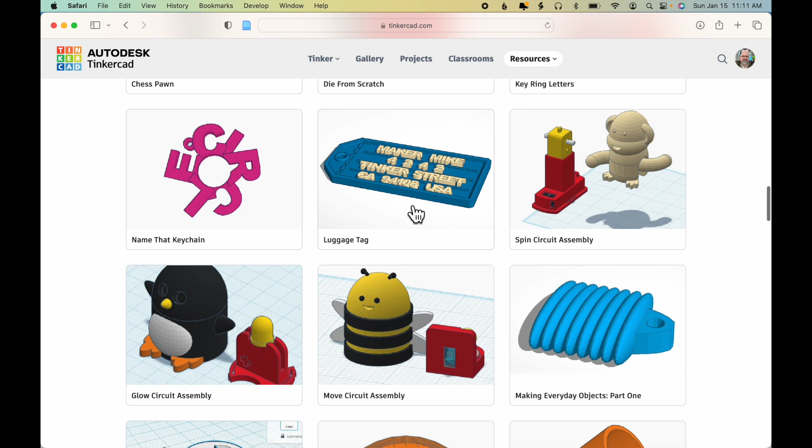Luggage tag. Do the entire tag, but you don't need to use your actual home address if you don't wish. You can use the address of your school instead. You'll be doing the zipper pull, Making Everyday Objects. If you click on this exercise, you'll see that there are several lessons included in it. You only need to do number 4, the backpack zipper pull.

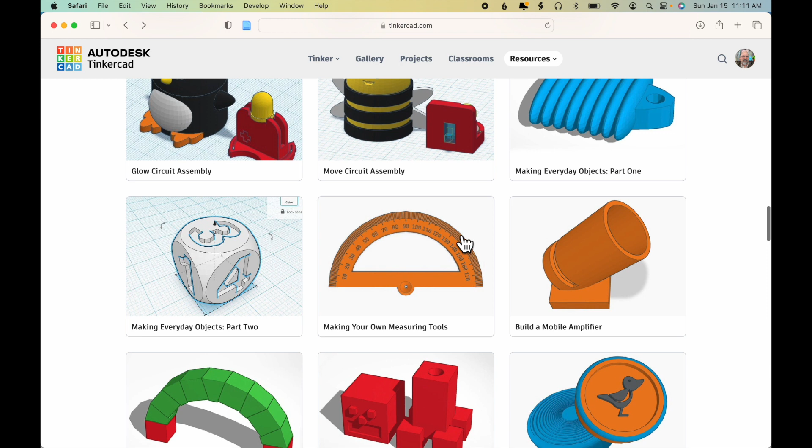And similarly for Making Everyday Objects, Part 2, if we look at that exercise, you'll see there are 3 lessons, and you will only need to do number 3, create your own monogrammed ring. For all of these exercises except the monogrammed ring, the settings are very straightforward for FlashPrint. They're flat models with no overhangs or other unusual features to keep in mind. But the ring poses some interesting challenges, and we'll take a quick look at that now.

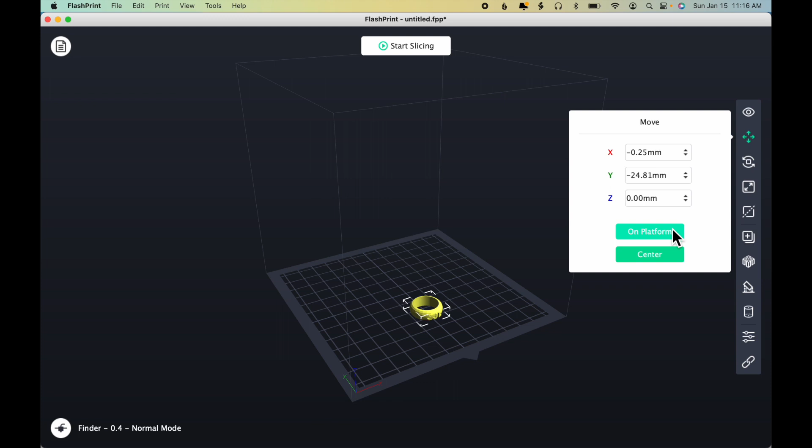Here's the monogrammed ring in FlashPrint. I'll click Move, On Platform, Center, and then scroll in, click View, then click and hold on the model to move it up to the center of the screen, and continue to zoom in so that we can examine it more closely. Look at the bottom. You can barely see little tiny tips of blue here. That's where the model is actually resting on the print bed.

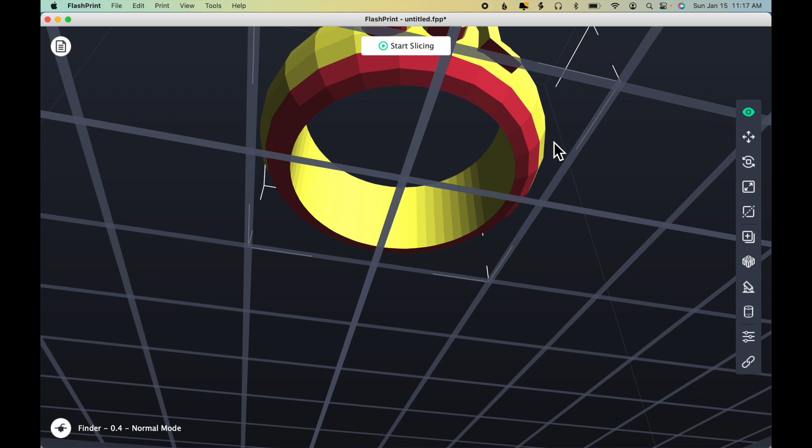The rest of these facets are all in red at the bottom, indicating that they're not flat on the print bed. These very bottom ones in particular are at a very steep angle, and then the next row at less of an angle. But that's all going to need supports. And of course, underneath these letters will also need supports.

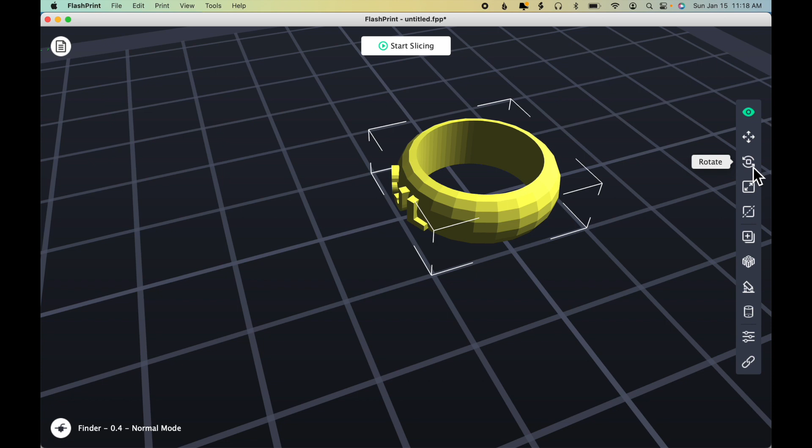Now you might think that just rotating the ring would solve the problem of most of those supports, at least for the letters. But let's take a look at that. We want to rotate it in the X direction. We'll click 90 degrees. Oops, it's the opposite of what we want. That's okay. We'll just click 90 and 90. So now that it's facing up, click off the model.

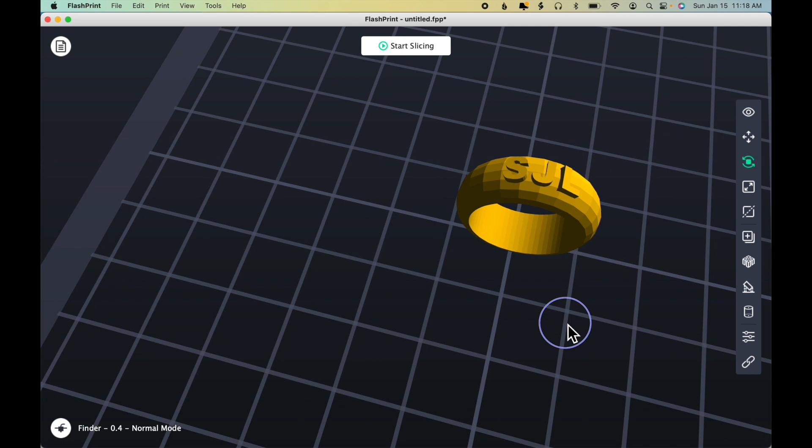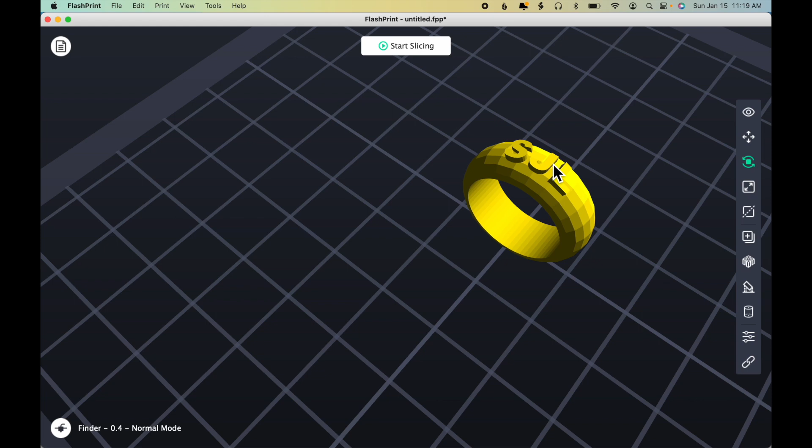So in this orientation, the letters would not require supports, but of course now the inside of the ring and this whole bottom area would require supports. So you could print it this way. You would end up with sort of a topographic effect, layer lines for the letters, which might be fine if you're printing at a high enough resolution, but there is a way to get smoother letters, and that's to print it in its original orientation.

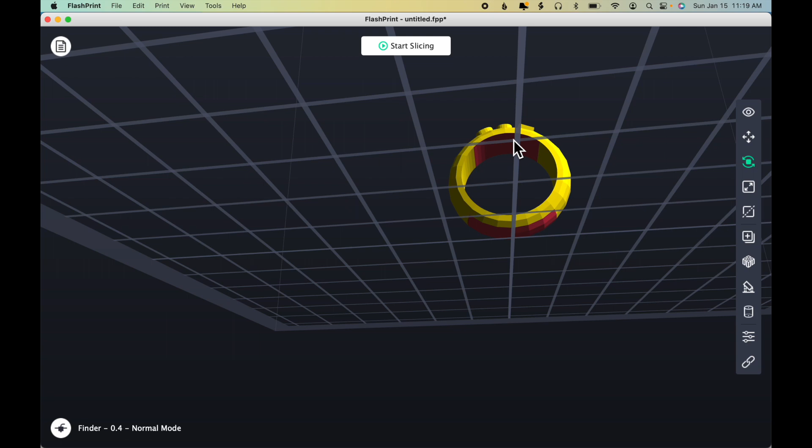The other concern you might have about printing the model this way is that with those interior supports, those will come out, but there'll be a little bit of roughness there. Of course, you can use an X-Acto knife and even sandpaper to smooth that out, because you're not going to want that rough surface against the skin of your finger. But if we print the model in its original orientation, there will be no supports on the inside, and so it will be nice and smooth. So I'm going to try it that way.

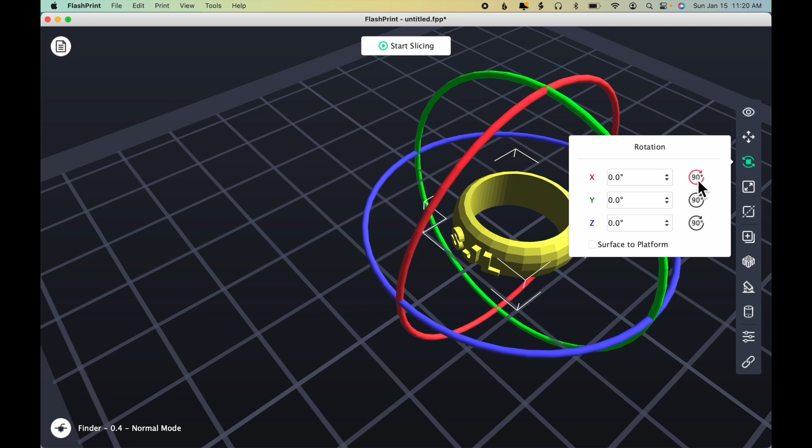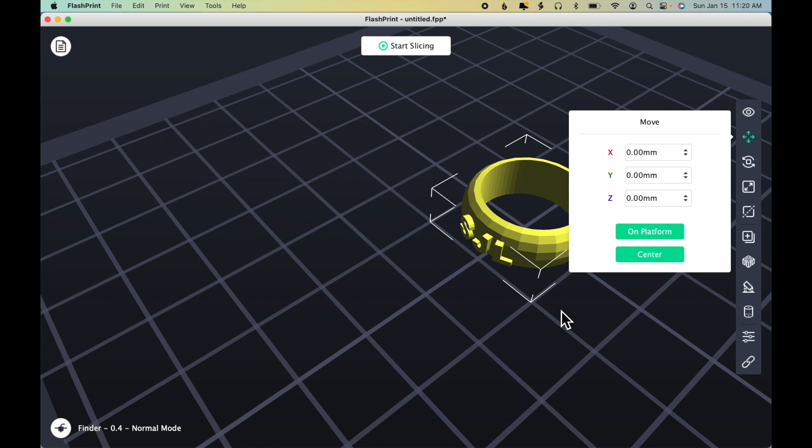Now, remember, you can print it multiple ways. You can try printing it standing up, and you can try printing it laying down like this, and see which orientation you prefer. It's a small model, so it shouldn't take very long to print. Because it's barely touching the build plate, I'm going to go ahead and actually lift it up 3 millimeters. Make sure it's centered, okay?

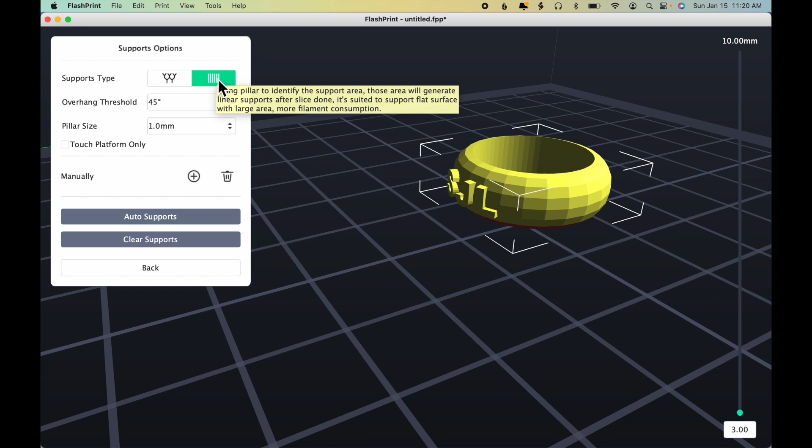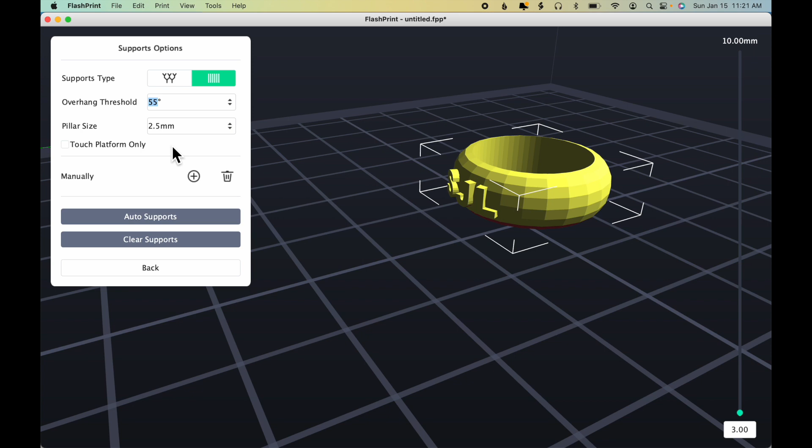And now I'm going to add supports. Choose pillar, and the pillar size is 1.0 millimeters because that's what it was the last time I used it. The default is 2.5, so I'm going to change it back to the default. And actually the threshold overhang was 55 degrees by default, so I'm going to change that as well and click Auto Supports to see what we get.

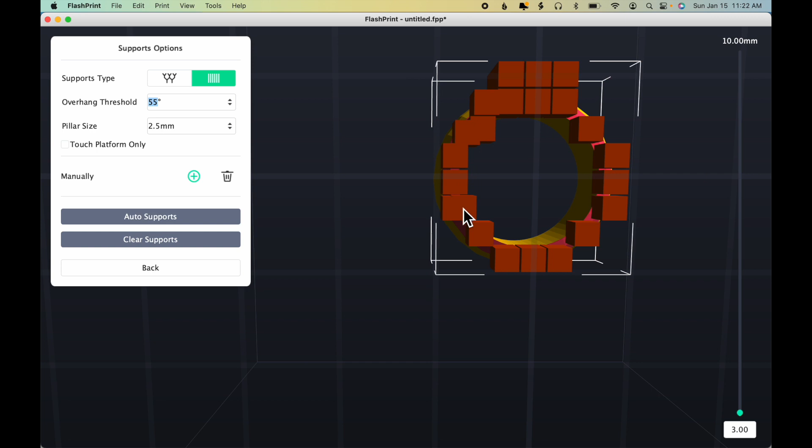Okay, well, it's covering some of the area, but not all of the area. So what I'm going to do is I'm actually going to click the plus sign, and I'm going to go ahead and fill in those areas where I still see some red. So I'm just clicking to add supports to make sure that bottom area is completely covered. Okay, that bottom is well covered.

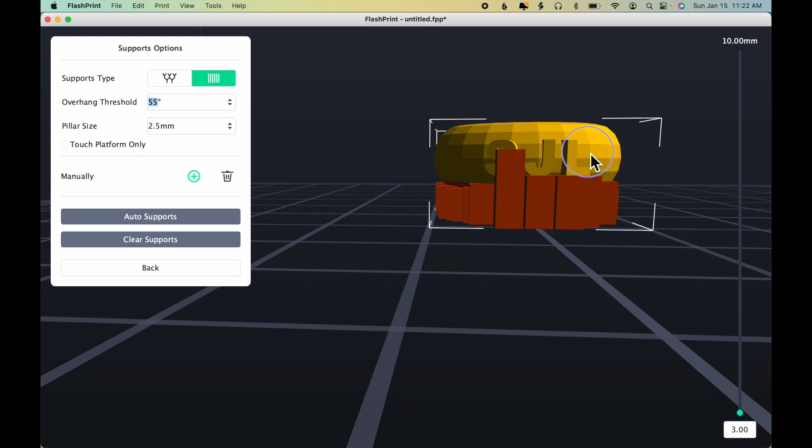You see there's a piece of the L that wasn't covered. The J looks pretty good. The S, there's a piece there that probably could use some support. And that part of the S, and maybe over here. Okay. All right, so now I'll call that good. Click back, click Start Slicing.

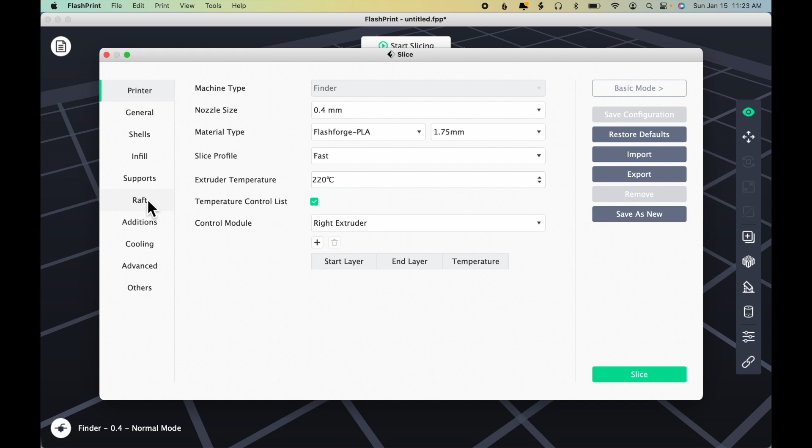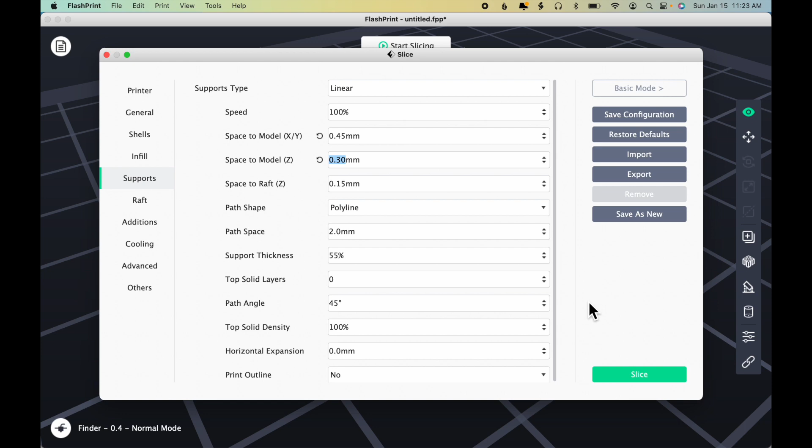Since I added supports, and some of those supports are resting on the build plate, I need to turn on the raft. We'll say yes. And then under supports, I'm going to increase the space to model X and Y to 0.45, and space to model Z to 0.3, and top solid layers to 2. And click Slice, Slice Preview. And that's what we have.

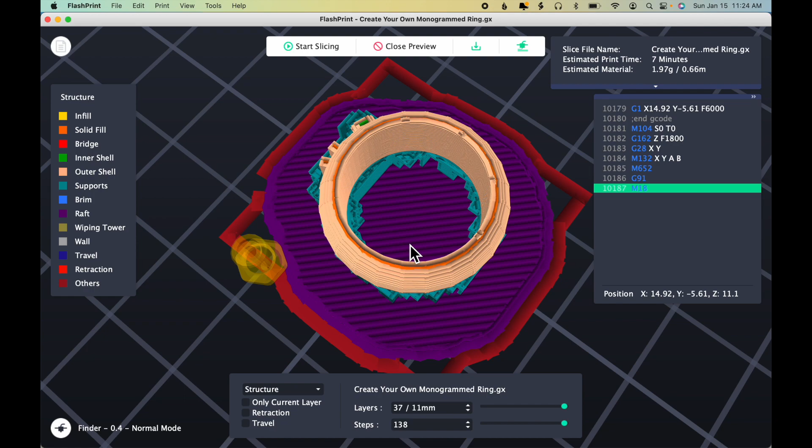So we have a raft, we have lots of support for the letters and the bottom part of the ring, and a nice clean interior. So that should be nice and smooth against your finger. You see the print time is only 7 minutes, so it's very quick. And if this doesn't produce the desired results, you can come back in, change the support settings, or change the orientation of the model and reprint until you have a satisfactory result.